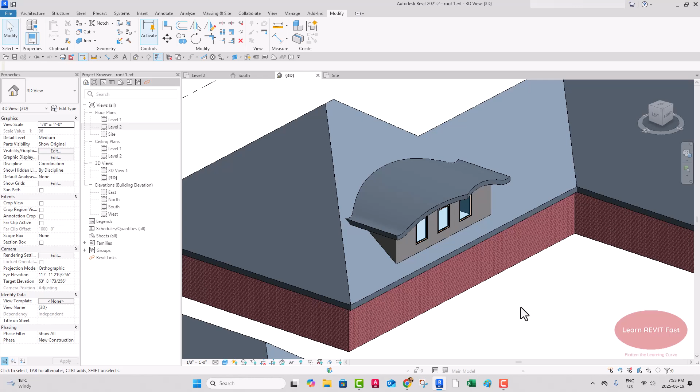This is the first phase of creating this cool dormer roof with the little peak on there, and the eyebrow effect on there was kind of neat. So we're gonna look over here. We've got the stage kind of set. Nothing really tricky going on. A couple of walls that are sitting on the second floor. There's no joining or anything going on here if you go to a floor plan. So those are just plunked on the second floor.

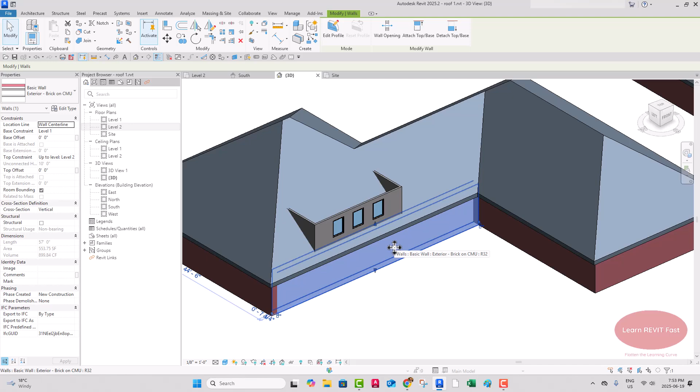So I'm going to create the eyebrow roof first here. So I'm going to go to the south view, click on there, and there I have a reference plane in there. So I'm going to start by doing a roof by extrusion instead of by footprint like we usually do. And I'm going to say pick a plane and hit OK, and I'm going to pick this front face. Boom. That sets the work plane up at level 2 here. That's okay. We can put it up as high as we want.

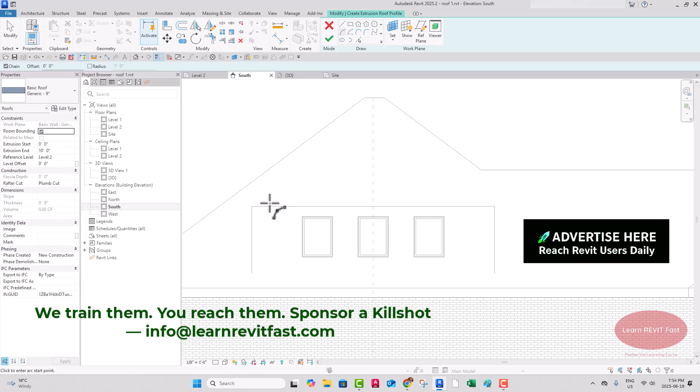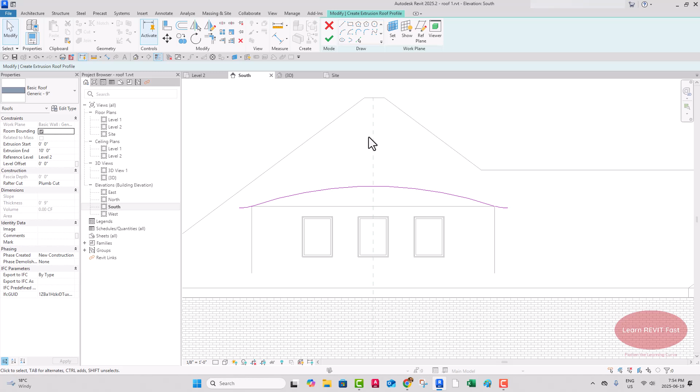Now you can use all these sketch shapes and different arc shapes. You should experiment with that, but I'm going to use this arc and come across and do something like that. And then I'm going to stay in the arc tool. I can change and then go over here and create that. So that's a little tangent point. Hit escape on the keyboard and escape again. Grab this little grip and bring it back. Hit escape again. Click on here. Hit my mirror tool. Mirror that about there. Hit escape again. Now from here I can go change my roof type to whatever I want.

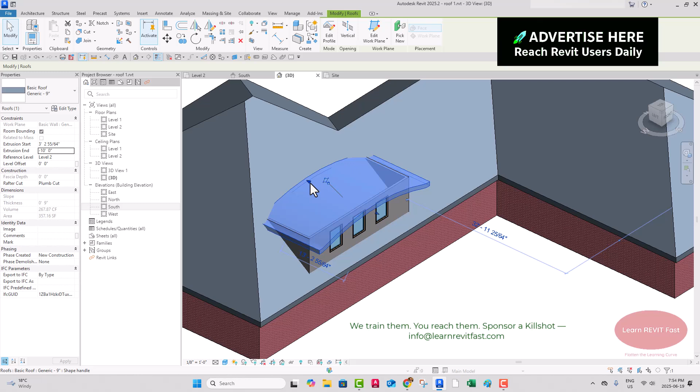I can switch to a 3D view. There it is there. It's going to extrude out the front. I can change this if I want to be minus 10 feet, because I know it's going to go in the other direction, and hit OK. And there it is there. If it goes in the wrong direction, that's okay, because you can pull these. And all I want to do is pull this through and form that seam line that's right there. You see that seam line? I want to get that, and I'm going to use that.

So for now, what I can do is use my join tool up in here, and you can create shortcut keys for all these. And I'm going to say join, and I'm going to say join the main roof with this guy. Boom. And that's going to form a hard line between those 2 points. While I'm in here, I can join this with this, but the sidewalls, I'm ultimately going to change the profile of that anyway, so I don't have to worry about that. I'm going to use an edit profile on that.

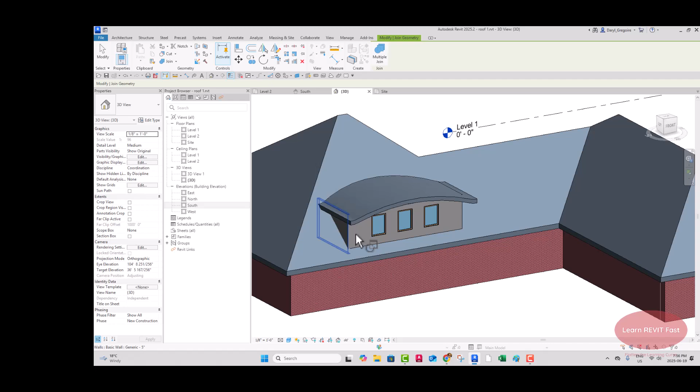Escape. So that's kind of just our first phase of doing that. I can take this wall here and say attach the top up to here, kind of make it look nice. So there's the first part of our nice little dormer project.